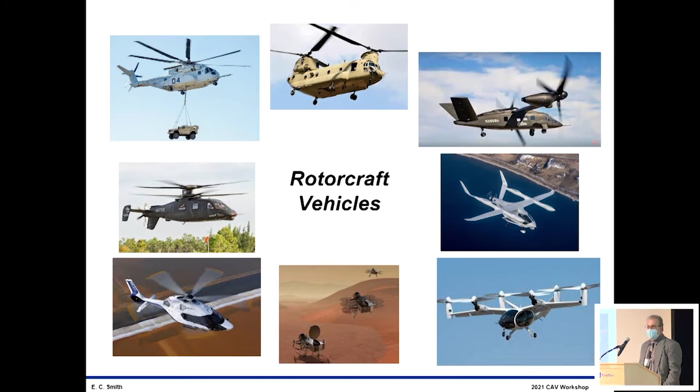On the lower right, we're seeing an increase in the interest in the community at large in what's called an air taxi, which is largely an electric driven vehicle. In some cases, it's a hybrid electric-driven vehicle with multiple rotors that hovers for a fairly short amount of time and then cruises for a somewhat short range, delivers passengers and cargo, and then recharges its batteries. This is something envisioned for the future in 21st century transportation, especially in urban areas. As you can imagine, there are a lot of noise questions associated with acceptance from the community, and there are also some related to passenger comfort.

The spectrum of Rotorcraft, Acoustics, and Dynamics is pretty wide. This morning we'll be focusing on the top rotor noise, rotor external noise, so I won't talk about all of the other things across the frequency spectrum. Etienne mentioned some of the sources for vibration. Over the years, we have a lot of different activities throughout this frequency range, but today we'll narrow it and focus on the rotor noise at the very top.

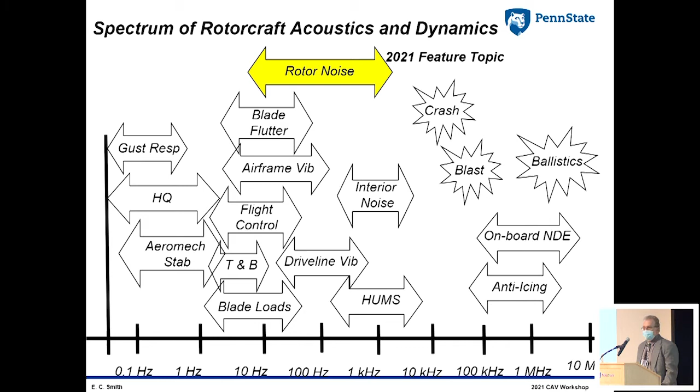We have a number of group members, three or four of us. Several of us are in the room who focus on Rotorcraft almost exclusively in our research and education, and then we enlist a number of other subject matter experts. There's quite a bit of overlap between our interests and needs and the CAV expertise, both experimentally and in simulation. Over the years we've had a number of faculty members in different departments. Eric Greenwood is highlighted, and I'll talk about Eric and embarrass him a little bit, and then turn the podium over to him in a minute or two.

We've had a number of students working with us. We have about 50 graduate students matriculating through the program in rotary wing engineering here. Some of them work on noise and vibration, others in different disciplines like aerodynamics or flight controls or propulsion and so forth. You've heard from a number of these students over the last several years, and it's good to say that they're employed throughout the industry and government laboratories. These theses make their way onto the CAV website on a real-time basis as soon as they go through the Penn State system, so if you have further interest and you're poking around the website, you can find a lot of different dissertations that may be of interest.

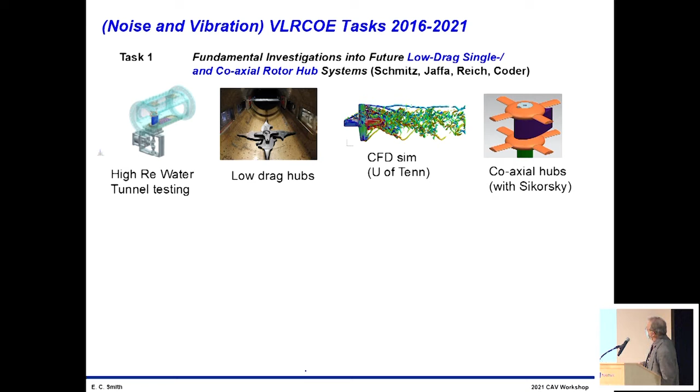We've been working for the past 5 years on our VLRCOE, our Vertical Lift Research Center of Excellence. That's our main program supported by the DoD and NASA here. There are a number of research projects, some coming to a close, some we continue to work on, and these are the ones you've heard over the years, so I don't want to spend any time on those other than to refer you to theses in these areas.

I want to give most of the time to Eric and mention our new program. The new program was a very competitive process; it goes on every 5 years. We were supported again, we found out in the summer, so that gives us another 5 years and quite a bit of resources to hire students and pay for equipment and so forth. Eric Greenwood, Professor Greenwood, will explain some of the new projects that we'll be starting in a few moments. There's also a web link for you that gives a whole list of the projects and some more background.

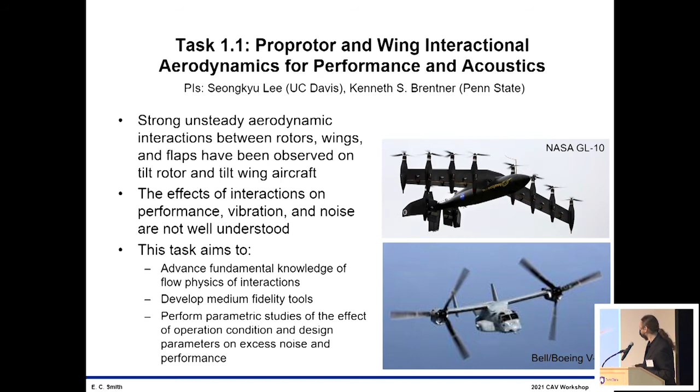Just to give you some flavor of the work that is out there, this comes from a study by Joon Lim of the Army, where he started looking at high fidelity CFD computations of this prop rotor wing interaction. There's really 2 kinds of phenomena that govern this.

One, shown there on top, is that the wing actually displaces some fluid flow around it, and that displacement causes basically an unsteady loading to occur on the big prop rotor in front of it. Another thing we have there on the bottom says wing loading.

The wing itself, in the act of generating lift, has a circulation around it. So there's an upwash ahead of the wing and a downwash below or behind the wing, and that generates a very different form of unsteady loading. The combination of those two gives us some unsteady loading on the prop rotor. Anytime we have unsteady aerodynamic loading in acoustics, especially when things are moving quickly as they are in the rotor, that's going to relate to the generation of noise.

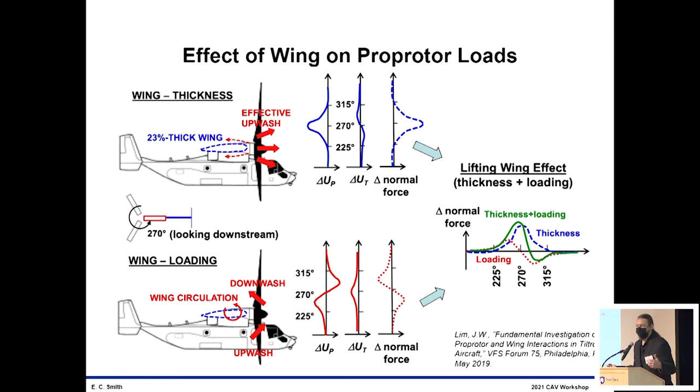There's an earlier paper here with Jinhua Zhang, Ken Brentner, and Ed Smith that was looking at some mid-fidelity predictions of this prop rotor wing interaction and the impact on acoustics. Here are just two polar plots.

You're looking from the top down on the noise radiated by the aircraft, which is moving towards the left. I realize now I neglected to label these, but the one on the left is showing us just the acoustic radiation, both thickness and loading noise, for this prop rotor in an isolated configuration. The plot on the right shows what happens when I bring that prop rotor close to a wing, in this fully configured aircraft - the overall sound pressure level polars.

You can see there's a dramatic increase in the noise, especially up and down the axis of the aircraft. So I'm dramatically increasing the noise being radiated ahead of the vehicle, which could be a big concern if I don't want people to hear me there.

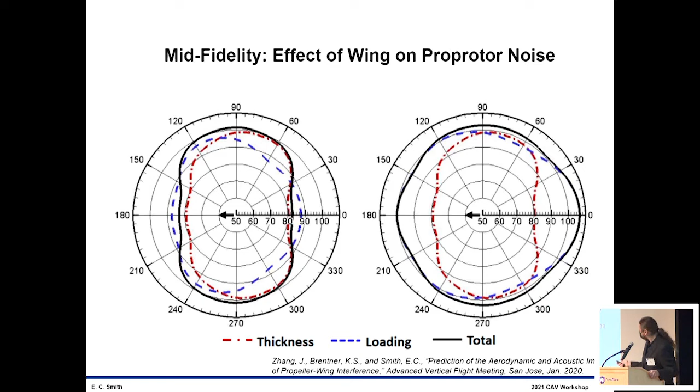Now, Joon, in his paper, also took a look at, using a high fidelity calculation, what the effect of the proprotor was on the wing, right? As opposed to, we have this close coupling. It's not just the wing affecting the proprotor, but the proprotor affects the wing.

When he took a look at the loads on the wing, and this is basically a plot on the y-axis, we're looking down the semi-span of the wing, so the bottom there is close to the vehicle. As we get out towards 1, that's towards the wingtip. And you can see the loading fluctuates quite dramatically over time, especially right where those proprotor blade tips pass near the wing. And on the right, for emphasis, we've removed the mean value of the loading, and you just see this unsteady loading.

And the thing is, this will, of course, have some impact on the vibration that we feel through the structure, and it's going to have an effect on the performance, because those are pretty big in magnitude, actually, that unsteady perturbation compared to the mean.

But this is a big radiating surface, too, right? So the wing has an enormous amount of area. So even though it's maybe not moving at a high Mach number, we have quite a lot of unsteady loading distributed over an area. And whether you want to call that an aeroacoustic phenomenon or just a realization of acoustic scattering off of that wing, it still has the potential to have a significant impact on the noise.

Problem is that to get this prediction, you have to run right now a CFD calculation on a big DoD supercomputer. And really the goal here is to find a way to build a mid-fidelity model that you could use when you're trying to design a tiltrotor that would be able to replicate similar physics.

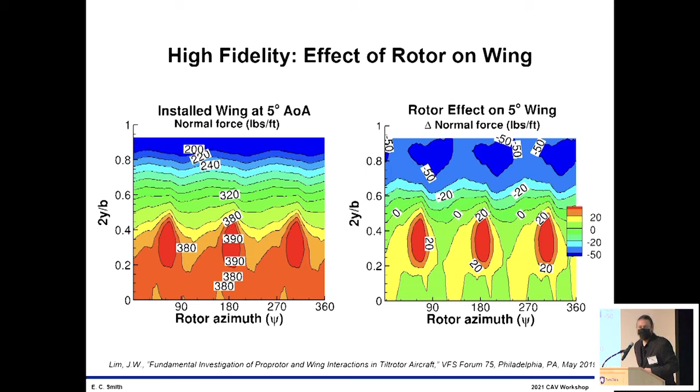So moving on to another one of these acoustics tasks. This is one that I'm working on along with another recent hire in the aerospace department here, Mark Miller, and then Jose Palacios has another presentation following this. And here we're looking at this idea. We are very concerned with these acoustic interactions.

And what makes it really challenging for us is a lot of these interactions happen at a long wake age. In a sense, the vortices are created by upstream propellers. They don't interact with anything until they're far downstream. So they get quite turbulent. It's very, very hard, even with high fidelity codes, to predict this kind of phenomena accurately over that amount of time. So we need more experimental data in order to model this.

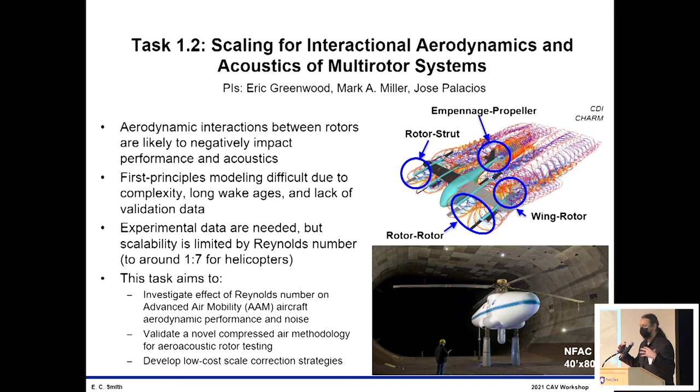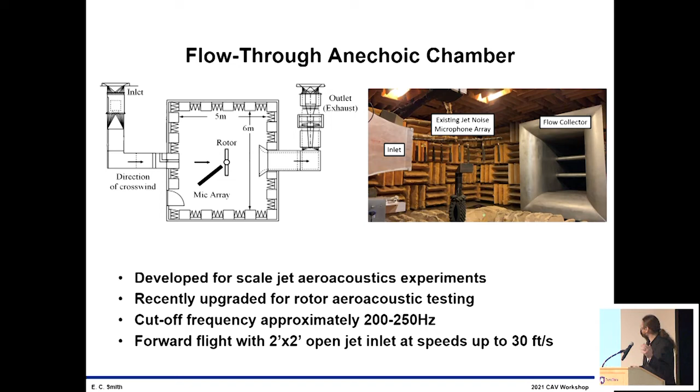So we have a facility, some of you may be familiar with it, it's been used extensively, particularly for jet noise measurements. It's an anechoic chamber with a small scale wind tunnel that passes through it. It's got a 2x2 opening at its widest configuration. And we've recently, working with Jose Palacios, developed a pretty unique multi-rotor testing capability. And this is nice for looking at these interactions because we have multiple test stands.

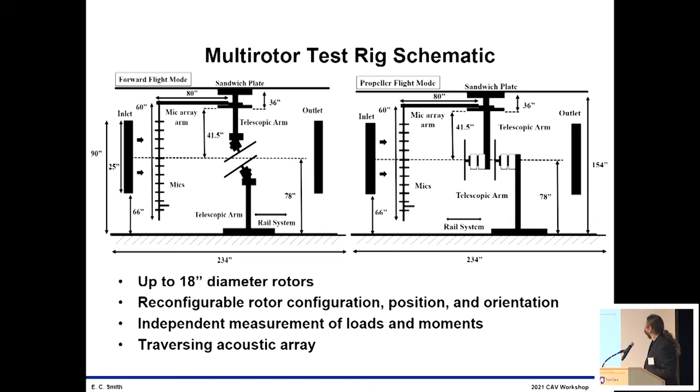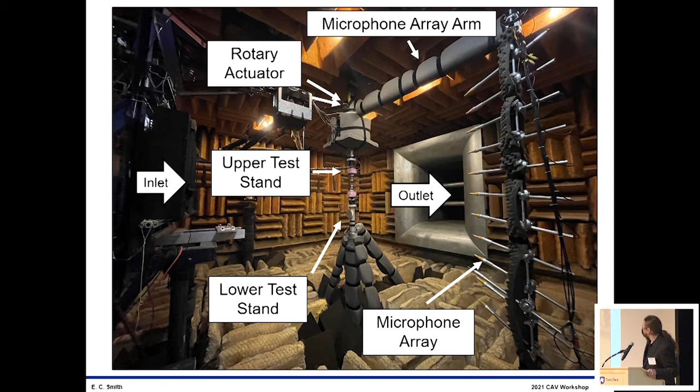Those of you who are taking the short course tomorrow will get a chance to see some of this in person. So that kind of gives us our small scale. At large scale, Jose has also been building up an 8-foot diameter rotor test stand, give or take.

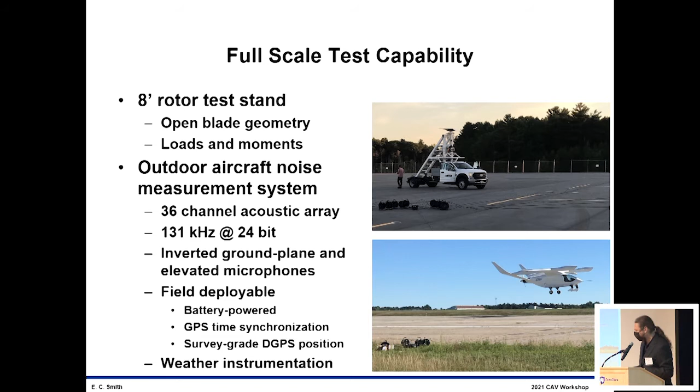In my research group, we're doing a lot of outdoor noise measurements. Over here on the right, we have some things we've been working with Beta Technologies to take noise measurements of their vehicle. That's actually their rotor test stand, so also about 8-foot diameter. We've collected some full-scale data for their rotor in hover, as well as for their vehicle flying. And so we can get, at least for hovering conditions and working with some industry partners, some full-scale data. And then really the trick here to try to reconcile the two is this noise scaling theory that's been developed.

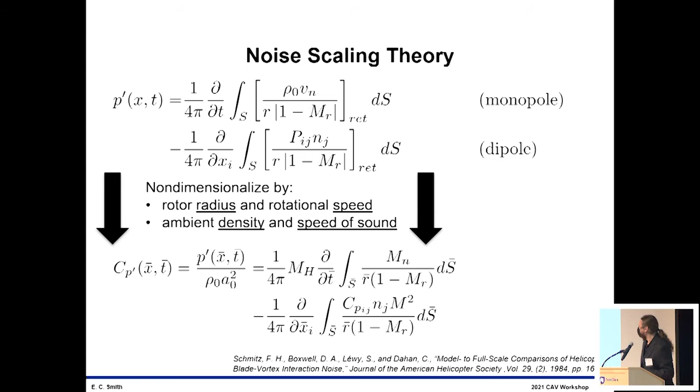So if we start with our Ffowcs Williams-Hawkings equation, right, we can non-dimensionalize that as we do as good engineers, and turn this into a non-dimensional form like we see below. And if I look at this equation here, I basically have the acoustic pressure as a function of rho c squared, or proportional to the ambient pressure. And I can get that as long as I match the non-dimensional aerodynamic operating condition on the right-hand side.

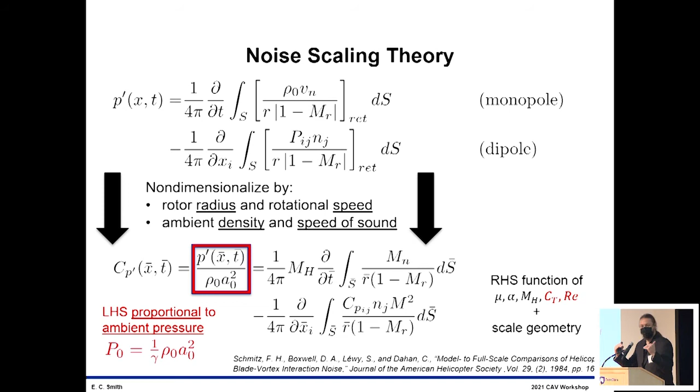And the problem I have here is I've got 5 parameters: advance ratio, angle of attack of the rotor, tip Mach number, thrust of the rotor, and the Reynolds number on the right-hand side, and I can, at most, in regular air, match 4 of them, right? However, if I somehow were able to change, say, the density of the air, I could then adjust the thrust coefficient, the Reynolds number, on the left-hand side ambient pressure, and I could make this scaling work without having a Reynolds effect.

And fortunately here, Mark Miller has been building up this compressed air wind tunnel that is designed exactly to do this, to give us aerodynamic similarity up to maybe 34 atmospheres of pressure, right? And as I increase the pressure, the density increases almost proportionally to that. So I should be able to get exact aerodynamic scaling, say for an 18-inch rotor in this tunnel, to correspond to something like a 51-foot rotor, like a full-scale helicopter rotor, without sacrificing anything in terms of Reynolds number.

This kind of stuff has been well explored for things like wind turbines, but we're trying to apply it now to higher tip Mach number rotors, and we want to look at acoustics. Taking acoustic measurements under high pressure is a little new. We don't have great understanding of how the microphones perform, especially up at 34 atmospheres or higher, or some of the anechoic materials. So we've been doing a lot of groundwork, building custom calibration equipment so we can verify the response of the microphones and verify how well the anechoic treatment works. So we're really excited about this ability to try to bridge the gap between small scale and large scale.

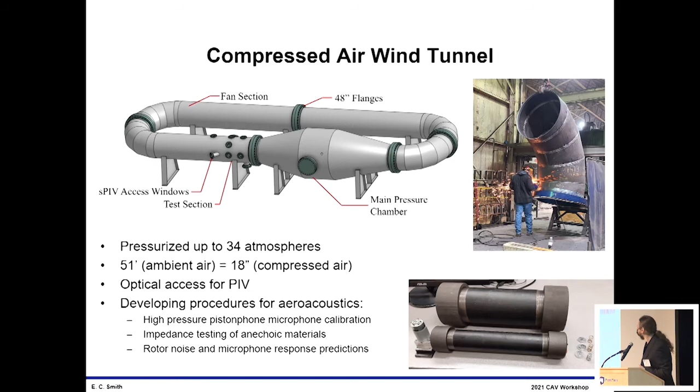And then the last thing I wanted to talk about was another task here with myself, Jack Langelaan, and Ken Brentner on acoustically aware aircraft, right? And so in our experience with helicopters, because the rotor is so sensitive to changes in operating condition, we have a lot of ability to control the acoustic impacts by adjusting the flight operations of the vehicle.

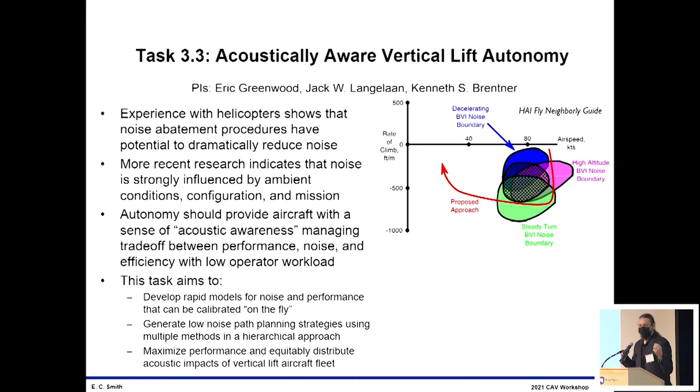And that noise hot spot is really, again, because of changes in the aerodynamic operating condition, affected by things like the weather, the weight of the vehicle, how it trims out, the drag on the vehicle, right? It's very specific to the time when I'm doing that operation and what I'm trying to do. So moreover, a lot of our experience, say with the HAI Fly Neighborly operations, has shown that they can be limited by things like the weather, right?

If the ceiling is lower because I've got cloud cover, I might not be able to fly in as steep a rate of descent as I'd planned. So I really need to be able to provide guidance at the time of use, not based on some pre-calculated, pre-looked up kind of work. So that's the idea here, is how can we get on-the-fly noise abatement guidance and really even embed it into the autonomous system of the aircraft so it can fly more quietly.

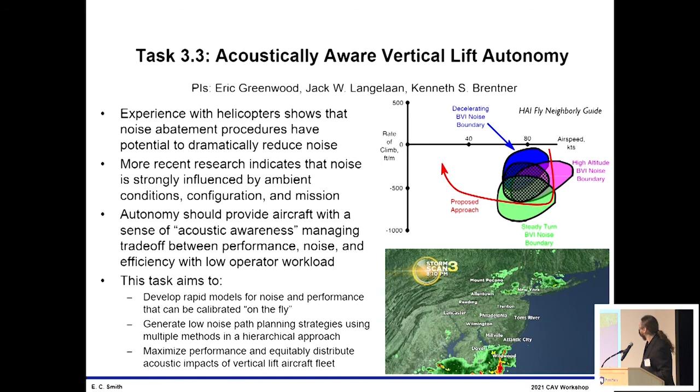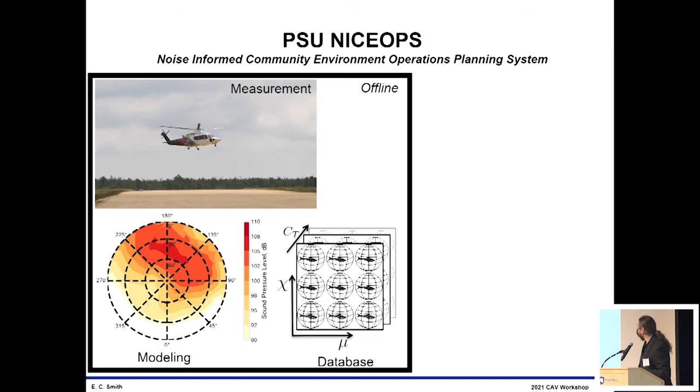So we've done a little bit of work on this area. We've been developing a code to do quick noise predictions, where you can basically take some measured data, use that to calibrate some experimental models and build up a database all offline of the noise radiation characteristics of that vehicle, say as a function of a bunch of hemispheres. And you can take all the time in the world to do that. And then at the time of use, I can now just look things up from that database, scale them appropriately using the same sort of non-dimensional parameters I talked about before, and predict the noise on the ground.

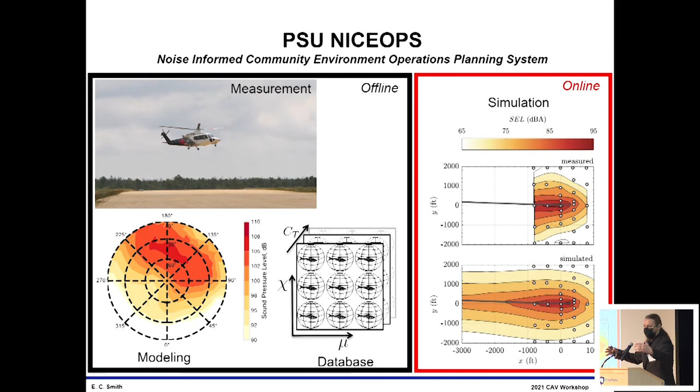So this is an example comparison for an S-76 helicopter of the sound exposure level contours for an approach. Top is measured data, the lower portion is a prediction. We're able to use the predictions in this case to help NASA out by extending where we could put that acoustic array, essentially.

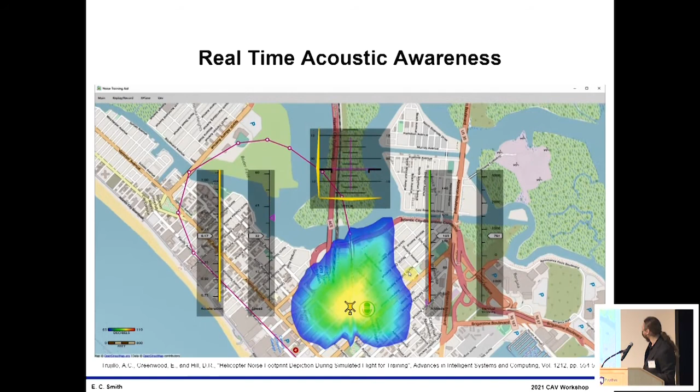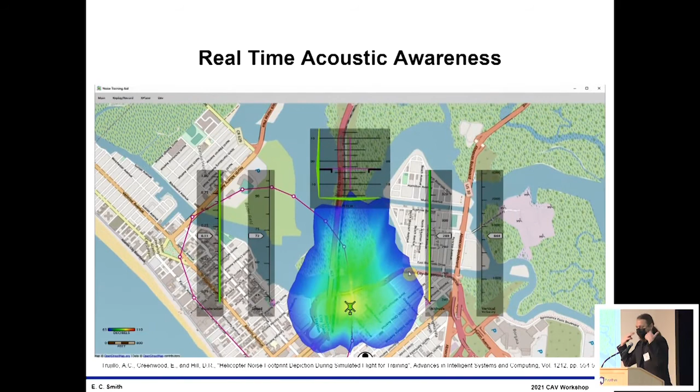So this same model has been used in another project we worked on with some folks at NASA for real-time noise prediction from a helicopter. And this has really been used as a noise training aid to help pilots figure out what to do to fly more quietly. We got very good positive feedback from this when we've taken it to operators, but it's not something you'd want to be staring at while you're trying to safely fly the helicopter in real life, right? It's good as a training aid. So what we'd like to do is have the autonomous system take over for that mental effort of how do you fly quietly while you're trying to execute the mission.

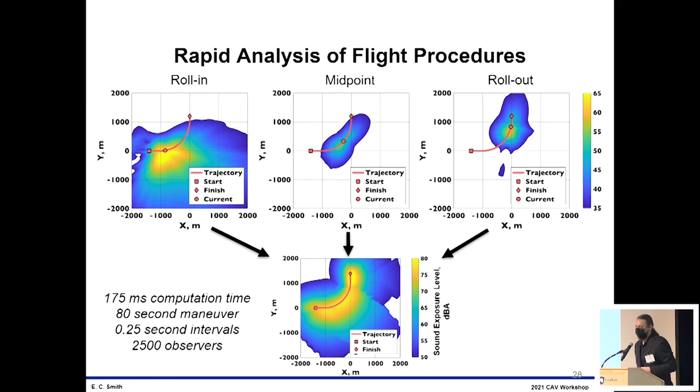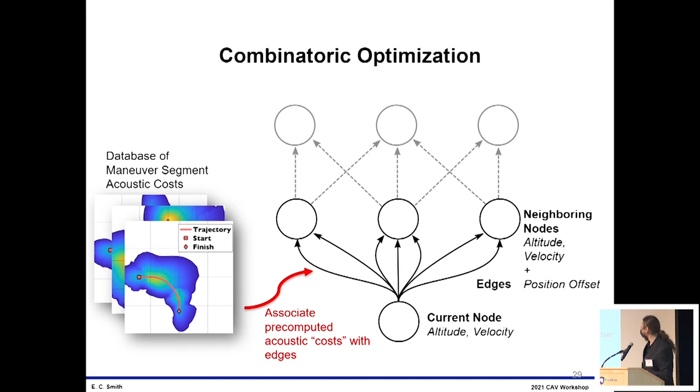So one of the approaches that we're looking at is, well, if I have this fast model, maybe I can pre-compute some different maneuvers. So here's an example of something like a turn. And if this only takes a fraction of a second to compute one individual maneuver, maybe I can compute all the sorts of maneuvers I might want to fly, and then, at least in my mind, I view this as connecting them together like Tinker Toys to build a path that gets me from where I am to where I want to be, right? And there's lots of really fast algorithms for doing this. If you've ever played a video game, these are the algorithms they use to make the bad guys move around. So we're trying to figure out what the lowest acoustic cost path is from where you are to where you want to be. And this is just sort of a demo of that in action.

A lot of other stuff goes into this, right? We have to worry about how efficient it's going to be, what the impact is on passenger comfort, performance, et cetera. And that's why we're going to be working on this for the next 5 years.

So just to wrap this up here, we have a few new acoustic tasks that are funded under the new VLRCOE. Very excited about that. They cover a full span here from predictions, noise measurements, and operations of vehicles. How can we use this data once we get it? And I think they're complementary in lots of ways. We're doing some measurements, which we could use to help validate and inform the predictions. We can use the modeling that we develop to help reinforce this operation and path planning work.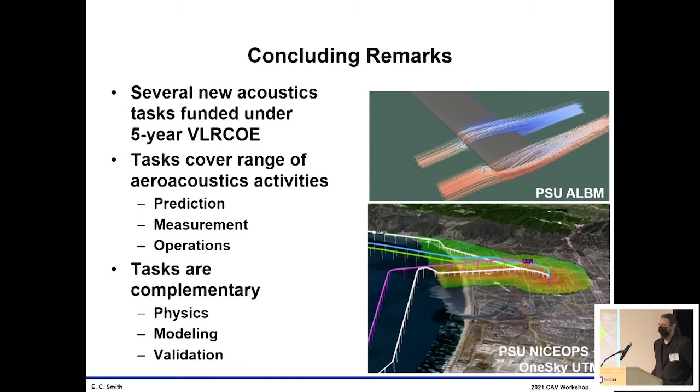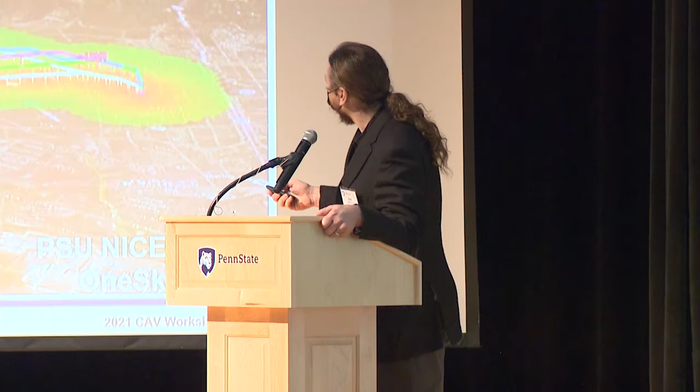Thank you. Eric, on your flight path simulation, what was the second box that showed up on the bottom? Was that an additional constraint? Yeah, so basically here we've got a closed chunk of airspace, and it's just a square for convenience. I guess I can't make it replay. But then it'll move, so we're just moving the area of airspace that's closed, right? And then I have to reroute, I have to react to that.

Oh, I see. So that could be a new block for whatever. Yeah, it could be you want to avoid airliners coming in, and you've got to close off some airspace. It probably wouldn't look like that square, but that's just a kind of a toy example.

Will it be possible to have multiple boxes, I'm assuming, too? Oh, it could be any arbitrary shape, yeah. And you can have as many as you want. They can be volumetric, right? So they actually have altitude and everything like that. Cool. All right, thank you. Yep, sure.

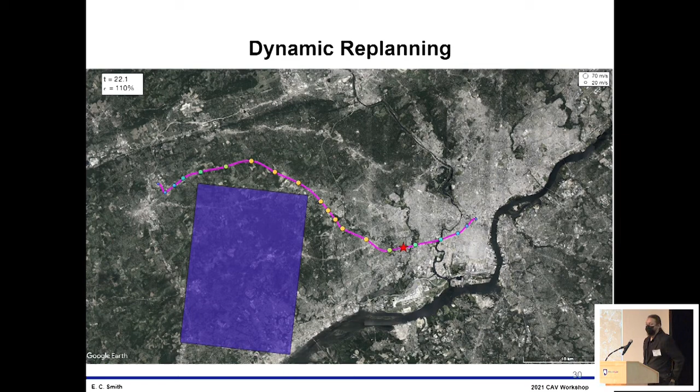Thank you very much. This is an interesting presentation. You got me thinking about a problem we have. When you talked about these wind tunnels and having to geometrically scale a fixture to evaluate it, I was thinking about scaling tube bundles to evaluate flow-induced vibration. Is scaling a fixture such as the helicopter rotor blades even a tractable problem? Do you understand the dimensionless parameters so that you can get a fixture you can use at a smaller scale and get meaningful results for full scale?

Yeah, certainly for aerodynamics, right? And Mark Miller has a background in doing this. This is something they have done for a little while for wind turbines. Wind turbines are enormous. Nobody can afford to put a full-scale or even fifth-scale wind turbine into a wind tunnel, so they shrink them way down and then run them under compressed air.

There are some tricks there, of course, because at some point my geometry is getting so small compared to the real thing, I have to be very careful about how I manufacture things. And they'll do surface roughness treatments and things like that to try to get the flow physics to behave in the right way. So there are some limitations because I can only build things so small.

But they've shown very good results aerodynamically, and these compressed air tunnels for airfoil sections and things like that have a pretty long history. Then we moved on to other things, and we're trying to bring that back and look at it from an acoustics point of view as well. Thank you.